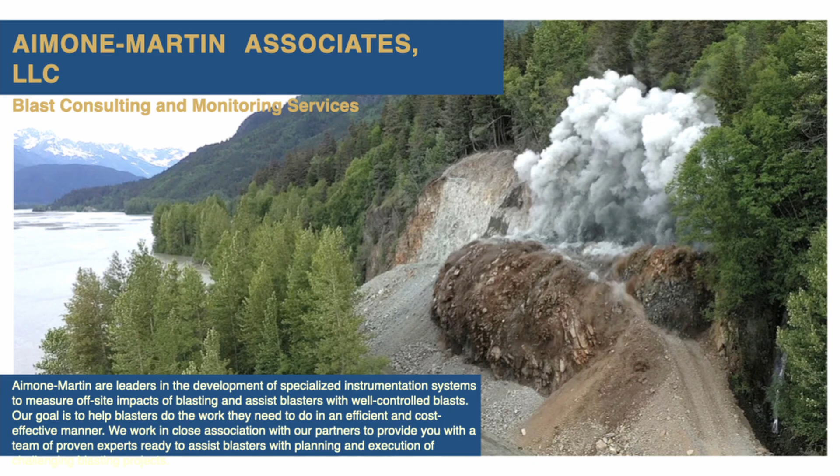This episode's presenters are Chuck Dowding of Northwestern University, Cathy Aimone-Martin of Aimone-Martin Associates, and Johan Gjodvad of Sigicom AB. Professor Charles Dowding is co-author of a number of USBM publications which are the basis for blasting regulations in the United States. He is also known for his 4 books. He's a former member of the Board of Directors of the International Society of Explosive Engineers and a distinguished member of the American Society of Civil Engineers.

Dr. Cathy Aimone-Martin is president of Aimone-Martin Associates in New Mexico. She served for 25 years as Professor of Mineral Engineering and is currently an Emeritus Professor with the New Mexico Institute of Mining and Technology. Cathy has over 40 years' experience in quarry and construction blast consulting and monitoring, specialised in close-in blasting effects on above and below ground structures. Dr. Aimone-Martin is the author of over 87 publications and regularly conducts training courses for blaster certification in 11 states.

Johan Gjodvad is a Strategic Partnership Manager at Sigicom, where his focus is innovation and the international market. His work ensures Sigicom continues to be a top innovative producer of hardware and software for environmental monitoring. Johan has extensive experience on environmental impacts like vibration, noise and dust from various sources, blasting during civil works and demolition using explosives. He has been part of the Danish Federation of Explosive Engineers since 2006 and is past president of the European Federation of Explosive Engineers.

This tag team presentation will begin with a graphical portrayal of the many levels of monitoring. We start at the lowest level, data, a single point. Did the peak particle velocity and/or time history of the blast satisfy a criterion? Quality of that data is heavily dependent upon seismograph placement, which is in turn dependent upon the training of the seismograph operator. Moving up to the second level, information, involves a second data point that allows drawing of straight lines.

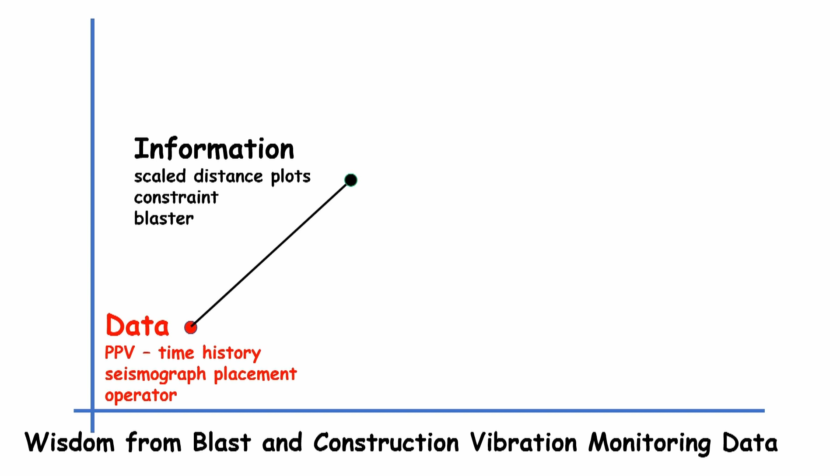Most often seen are scaled distance plots employed by blasters to describe influences of geology and constraint on expected peak particle velocity. Dr. Aimone will be presenting case studies of various uses of scaled distance plots.

3 data points allows construction of nonlinear relations and introduces a third level, knowledge. The Z-curve relation between dominant frequency and allowable peak particle velocity is such an example. Seismograph manufacturers are important stakeholders because they provide software to determine dominant frequency of time histories of the measured ground motions. The next level, wisdom, involves knowing how measurements compare with appropriate criteria.

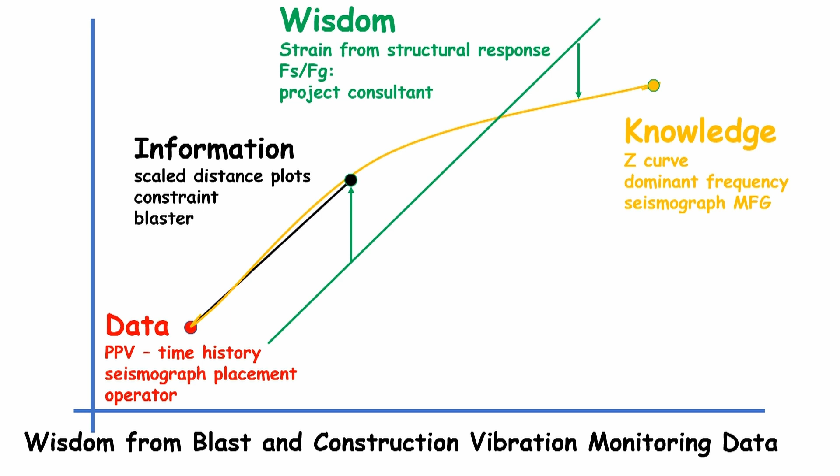For example, comparison of allowable strains with those calculated from measured structural response. Project consultants are most often involved in these determinations of critical strains. Finally, regulations need to be considered, and as shown, are not always consistent with physics-based criteria, for they are the rules by which the governing authority operates. An example might be the difference between a regulation based upon annoyance instead of cosmetic cracking. Johan Gjodvad will discuss the project to compare regulations around the world.

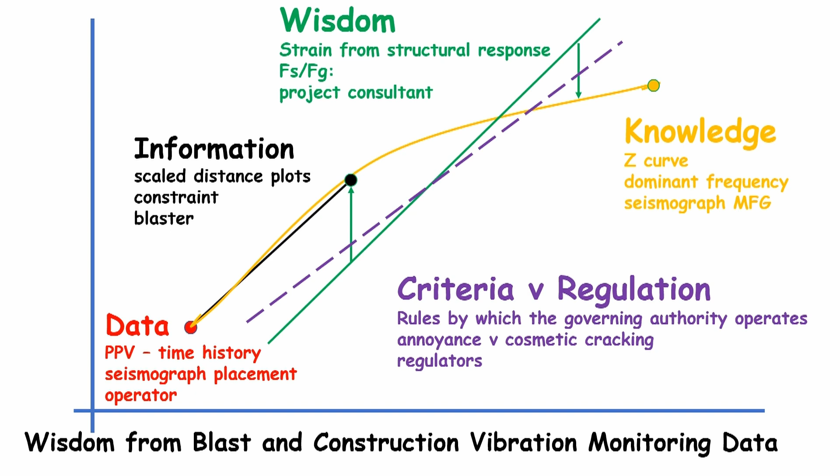This rubber band model of the structure on the left demonstrates the importance of frequency in addition to peak particle velocity. Most important is the ratio of dominant excitation F sub G to the natural frequency of the structure F sub S. This drawing shows that the cup is analogous to the mass of the structure. The stretch or strain of the rubber band is analogous to the strain in the walls of the structure, and the motion of my hand is analogous to the ground vibration motion. So watch this movie while I take a rest.

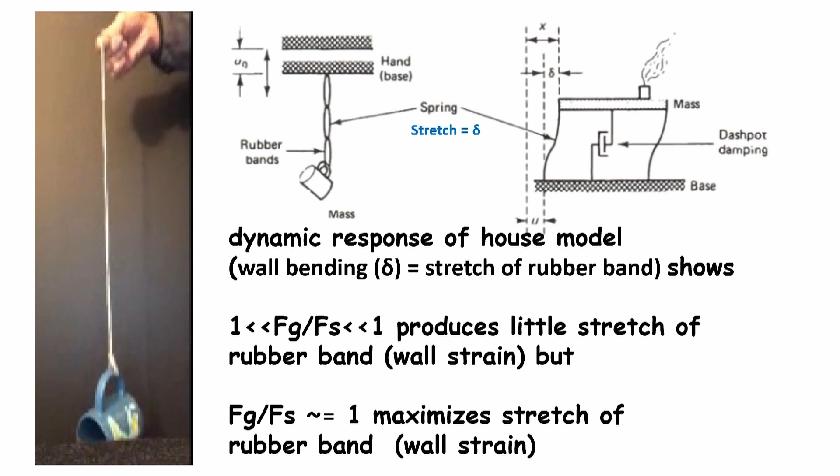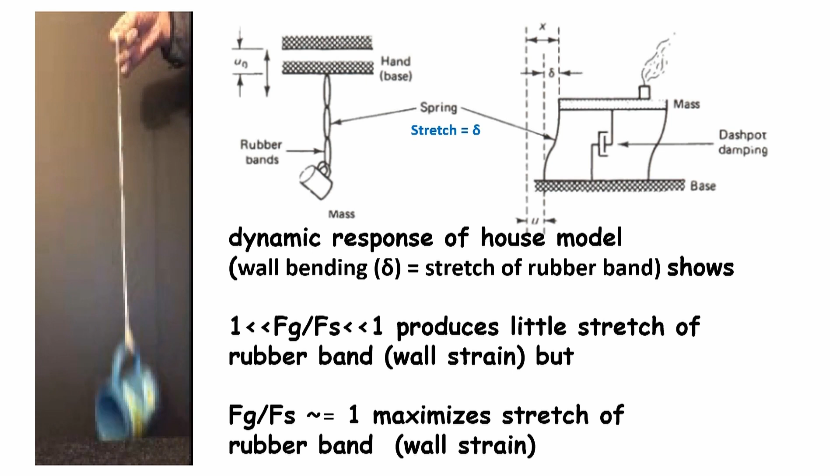This simple dynamic system responds at its natural frequency when excited with a single pulse. If it's excited with a high frequency, little stretch in the rubber band occurs. Also, if it's excited at a low frequency, there is little stretch in the rubber band. However, when excited at its natural frequency, the system's response is maximized. This response and stretch in the rubber band is equivalent to the strain, which causes cosmetic cracking.

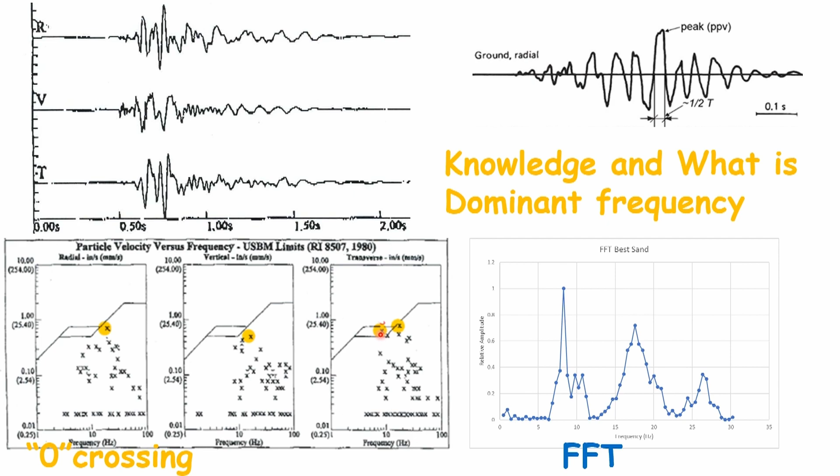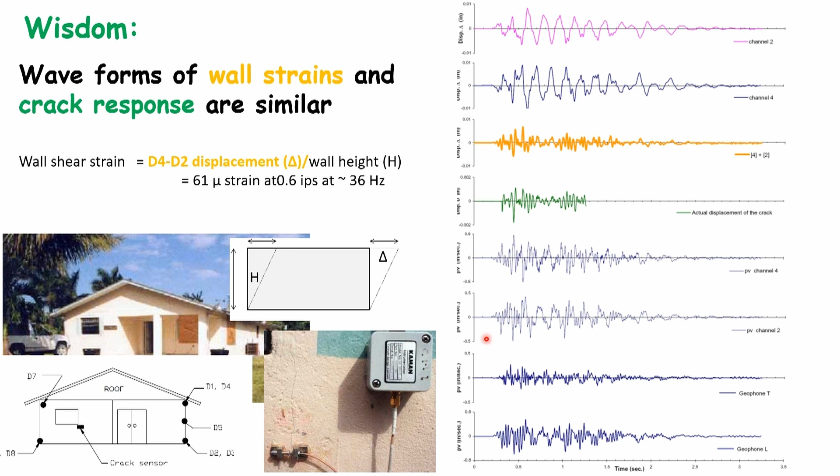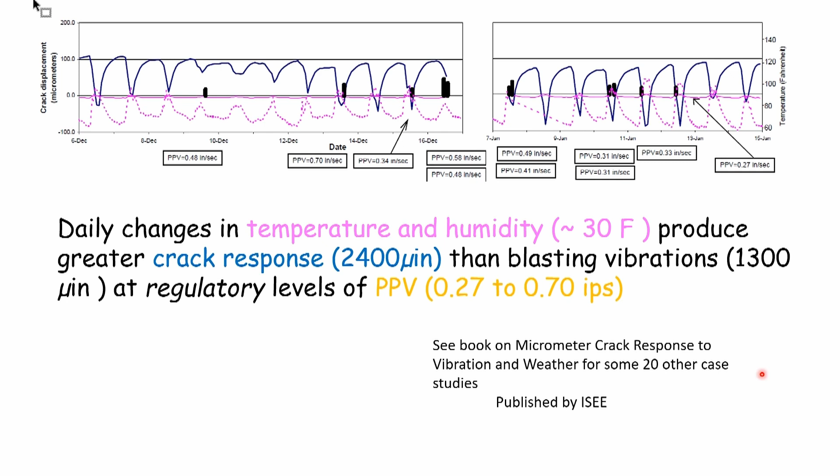Comparison of the long-term crack response in dark blue with the vibratory response in the black bars for the case history just described shows that daily changes in temperature in pink produce crack responses that are 2 times larger than that produced by blasting vibrations that exceed 0.5 inches per second. Furthermore, cracks open and close even more with the changing seasons of the year. For more response on this and other case histories, please see my book on micrometer crack response.

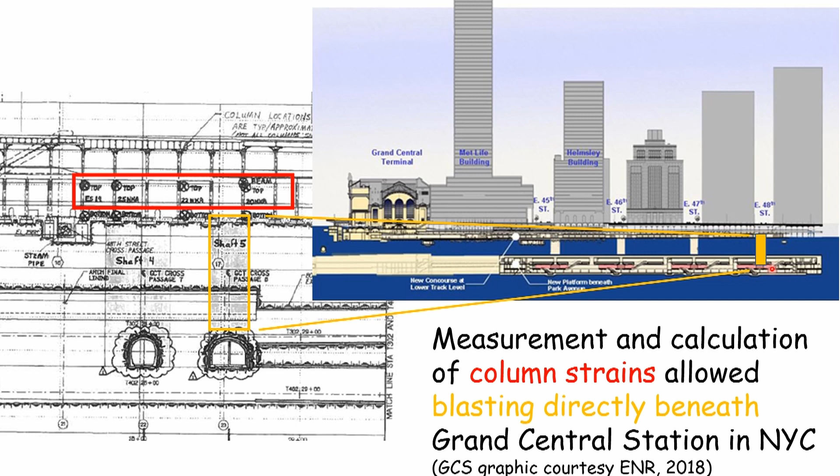During the blasting for ventilation shaft number 5 here, that occurred within tens of feet of the column foundations, column strains were directly and indirectly measured. Direct measurements were made with foil gauges glued to the steel after the fire-protecting concrete was chipped away. Indirect measurements were made by measuring the velocity response time histories at the top and bottom of the columns.

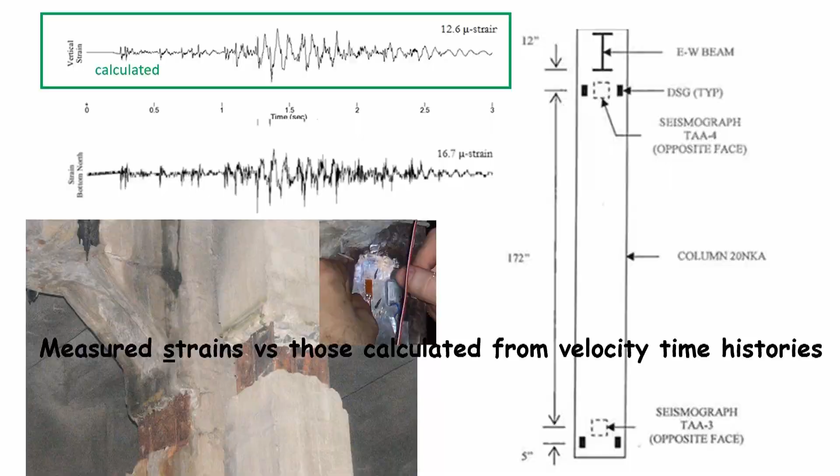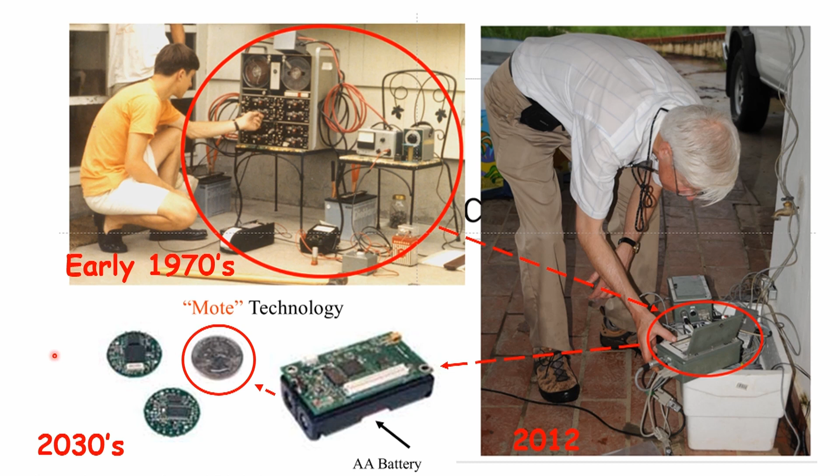There are two important things to take away from this presentation. The first is that the response of structures and the subsurface is a function of the strain induced by the passing of the ground motions that we commonly call blasting vibrations.

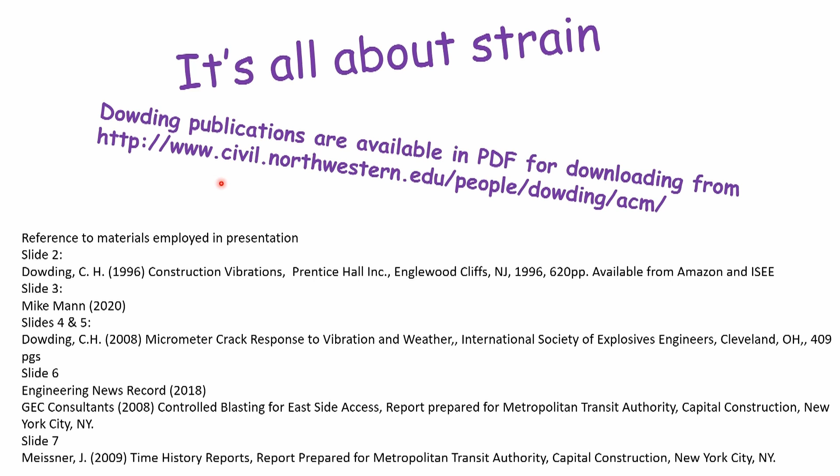Hi, I'm Dr. Cathy. I serve as a blasting consultant on many close-in and challenging rock blasting projects in construction and mining. I will discuss vibration monitoring and the use of seismographs placed close into blasts to compare the response of ground vibrations for different explosives and powder factors, time delay systems and timing, and illustrate best practices when responding to structure damage claims.

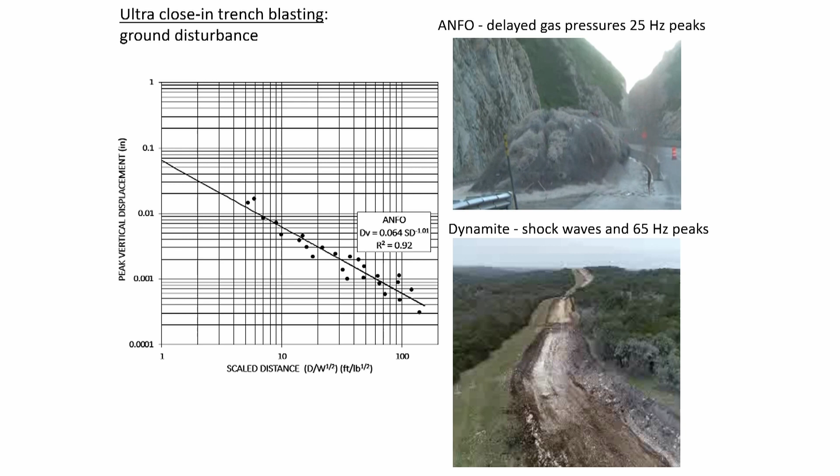ANFO delayed gas pressures shown here create excessive vertical rock motions at 25 Hz dominant frequencies, and the disturbance of the rock is well outside the trench perimeter. Close-in vertical ground displacements and attenuation rate, shown in the attenuation model to the left, are indicative of gas forces lifting the rock outside the trench perimeter.

Using dynamite, the blast shown to the right, one can clearly observe the detonation wave associated with very little ground disturbance outside the trench perimeter. 65 Hz peak frequencies dominate, and the more brisant explosives result in a far faster attenuation of vertical displacements outside the trench, shown with the model in the red symbols.

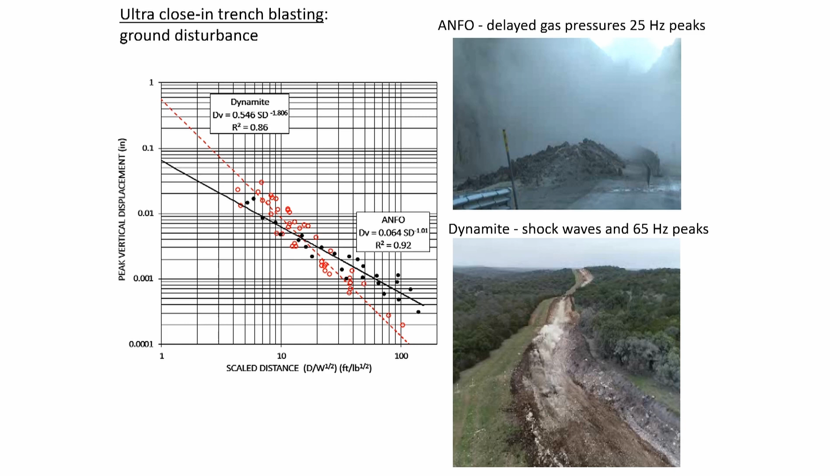Several blasts were performed at this limestone quarry to compare the performance of 3 initiation systems that included det cord delayed by row, non-electric pyrotechnic delays, and electronic delays. Fragmentation was characterized using Split software, and attenuation models for the 3 systems are compared in the lower left-hand corner. A power draw meter was placed in line at the electric meter station to continuously record primary crusher power consumption for each staged blast using a unique delay system.

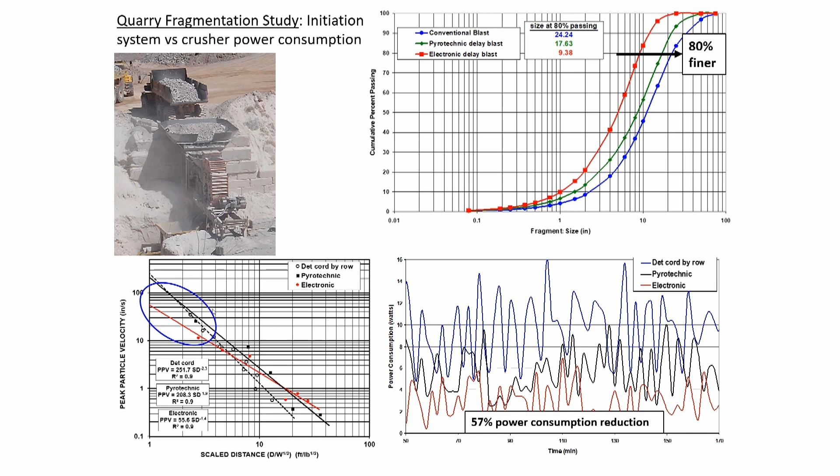The case of this Florida quarry is one of undershooting and wasting explosive energy. The quarry moved blasting operations from the northeast area to the southwest area and closer to inhabited structures. Electronic delayed blasting typically was performed with a powder factor of 0.2 pounds per cubic yard. The attenuation model provided a slope of -1.4 and an acceptable R-squared of 84%. In the southwest area, 4 decks of 100 pounds per delay were required to meet vibration limits.

Beyond a scaled distance of 10, peak particle velocity amplitudes were far higher than expected, and the model exhibited a slower attenuation rate at -1.26. After 5 blasts, we realized that we had cut our powder factor in half, and we were undershooting the rock, resulting in wasted energy. We adjusted the loading at a powder factor of 0.18 with 350 pounds per delay, and the attenuation fit in red exactly hit the 80th percentile line of the original model. Vibrations at the closest structure plotted right on the U.S. Bureau of Mines safe limit.

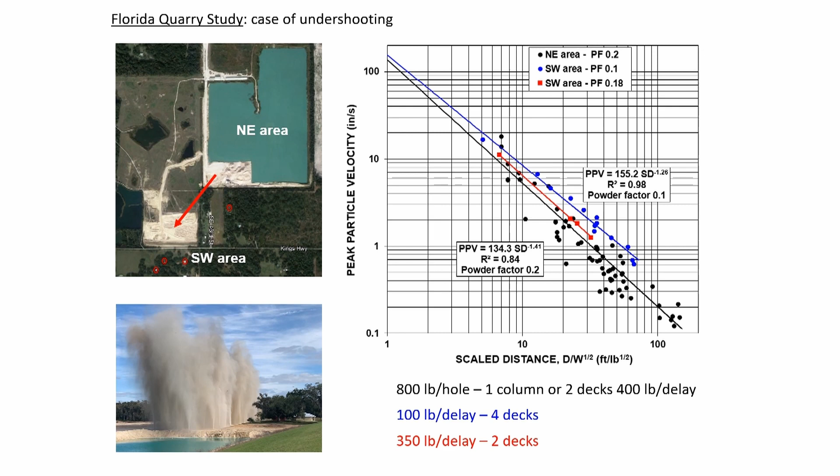The owners of the house outlined in yellow in the upper left photo initiated litigation against the nearby quarry to the north. The house sits within a 50 square mile area of documented slope instability and shallow landslide susceptibility. The claimant believes blasting damaged the home and claimed loss of value subsequent to a home sale, although no visible cracking in the house exists. Landscaping and asphalt drive show evidence of significant downslope soil creep toward the river to the south.

Seismographs were placed at the road 220 feet away from the house by the blaster, consistently generating PPV under 0.75 shown in the lower left. However, these amplitudes ranged in frequency between 2 and 15 Hertz, matching the natural frequencies of structures, as Dr. Dowding demonstrated with his bouncing cup. This frequency matching contributed to amplified structure motions and was undoubtedly perceived by the inhabitants as damaging.

The site attenuation model shown to the right, using records supplied by the blaster, resulted in an unacceptable regression correlation coefficient of 36% and a median y-intercept of only 3.9 inches per second, which is far too low for igneous rock. Such a model could not be used in the litigation case. We subsequently developed a more representative model and compared it with the blaster's model here in red. Data correlated perfectly; we now have a reliable model to predict worst case, highest possible ground motions at the claimant's structure to refute this claim.

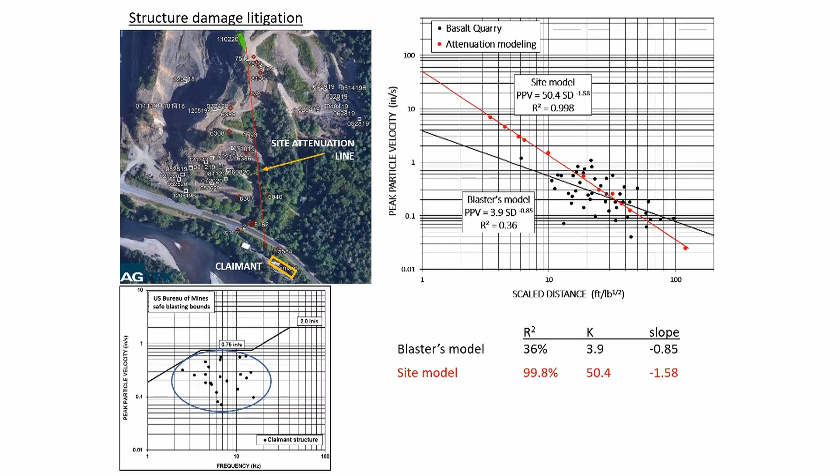In these examples, we have used site-specific ground motion attenuation models to explain and improve blasting performance. Such modeling can be extended beyond ground velocity using sophisticated seismographs with 8 channels and sample rates up to 128K. Breakout boxes can integrate seismographs with a variety of displacement, velocity, acceleration, and pressure sensors for a wealth of instrumentation demands in the air, underwater, and on structures as well as in the ground. As Dr. Dowding suggests, the future of instrumentation may be limited only by our imagination.

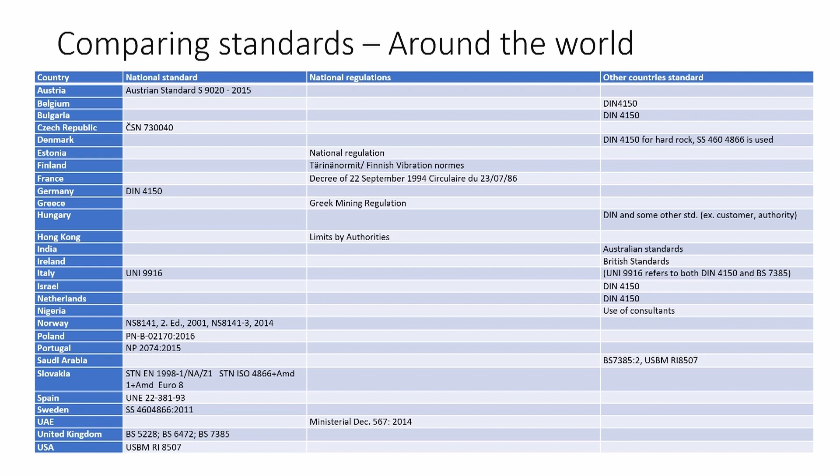The major difference between standards is whether the standard takes frequency into account. Most countries include frequencies, meaning that a higher frequency allows a higher PPV. In a few countries, the PPV value depends on the distance and on the underground. And then there is a third kind where the PPV value is independent of other parameters.

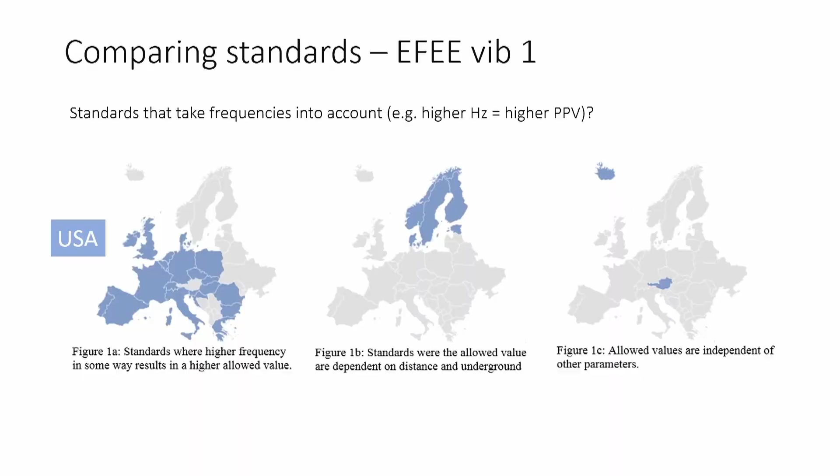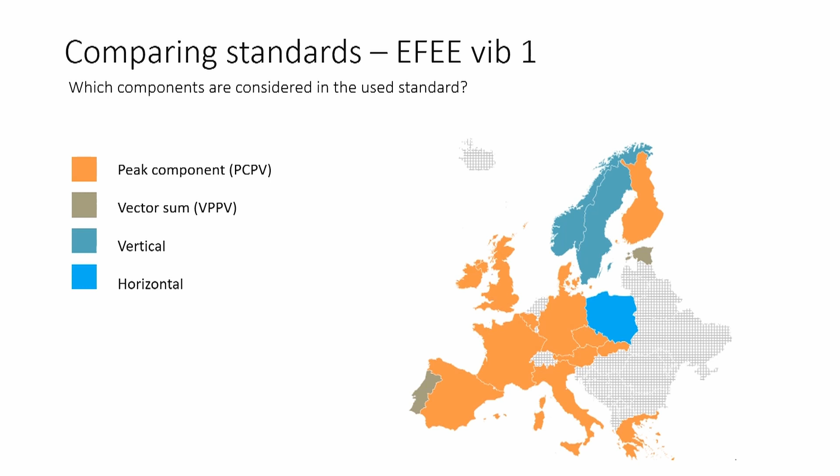A few countries make a sum of the components, as you can see in green, and two, Sweden and Norway, only consider the vertical components. I could explain to you why I believe that is the case. And a single country or standard makes use of the horizontal component.

Here's a graph showing some of the major standards which include frequency. The vertical axis shows velocity, while the horizontal shows frequency. Here it is well illustrated how PPVs with lower frequencies are considered more dangerous. There are different graphs depending on what type of house or structure is considered, of course. In this case, the standards are for residential houses or similar. Other categories could be fragile historical buildings or office buildings and so forth.

And there are, of course, completely different rules for tougher installations such as harbors, roads, etc. As you saw on the previous slide, this type of standard based on frequency is the most common. The red graph at the top is the USBM. It seems like the most lenient of the standards, allowing the highest values. However, it is also the standard we have found to be best documented, which is why it can defend the allowed high values.

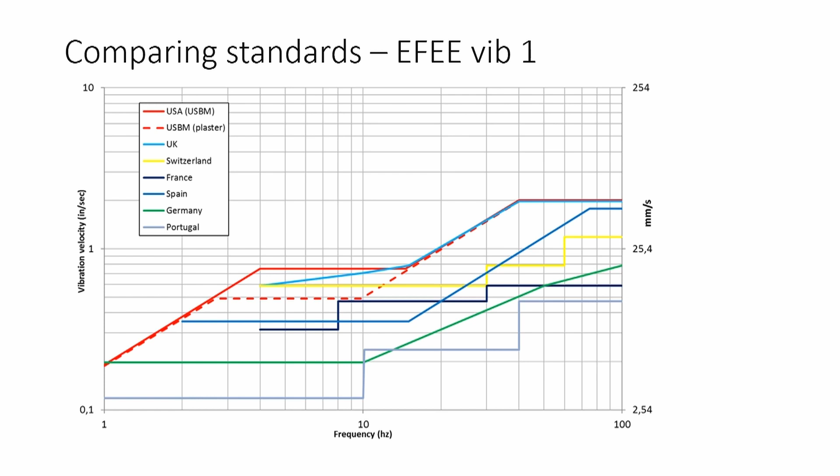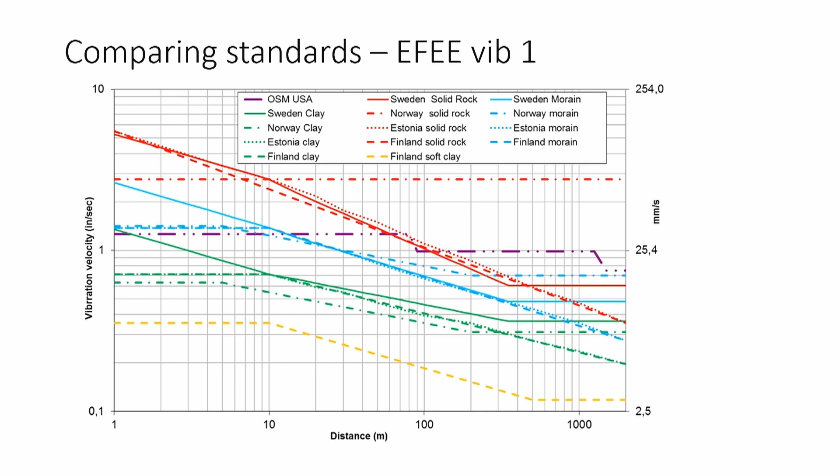Here, an overview of standards that depend on distance and the type of ground material under the structure. In principle, lower levels of vibration are allowed at longer distances and softer underground.

Positioning is different. It can be dug down, as they do in the US. It can be placed on the foundation, and some actually place additional seismographs on the top floor. And there are national standards by law, some just refer to other national standards, and some just do business as usual without actually knowing why.

Why is there this difference? Well, in our project we needed an explanation. Therefore we set out to make a second phase of the project. Of course we've been a bit delayed by the COVID pandemic and how the world looks because of that, but we aim to start monitoring as of March 2021. So basically while you're looking at it, I'll probably be on my way soon to the site. Well, the idea is to physically compare the different standards, to challenge them and see the difference in a live project.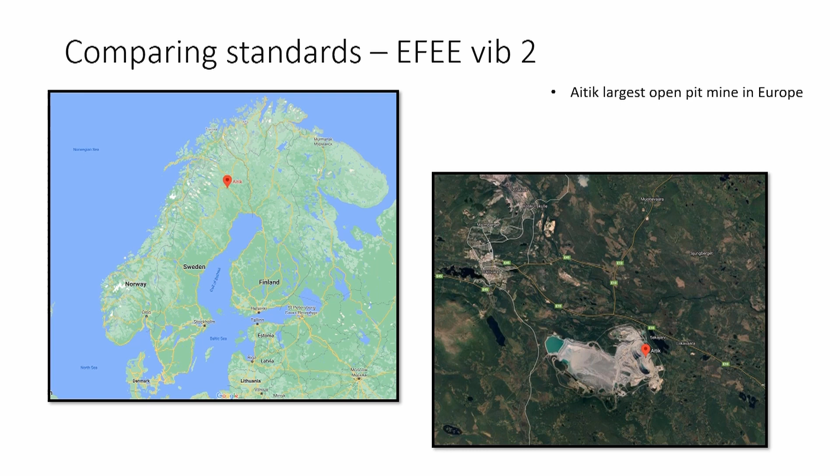We have been lucky to get access to the largest open pit mine in Europe, the Aitik mine, north of the polar circle, which blasts all year round. It's very close to Santa Claus, I should tell you. We have been given access to install equipment on the buildings, and we have actually already made our first site visit and installed equipment which is monitoring as we're speaking.

We cooperate with a local technical university, Luleå Technical University, on the project and have gotten a master student from them who is going to write his thesis based on the data and the things we're looking at, which is actually also to compare standards.

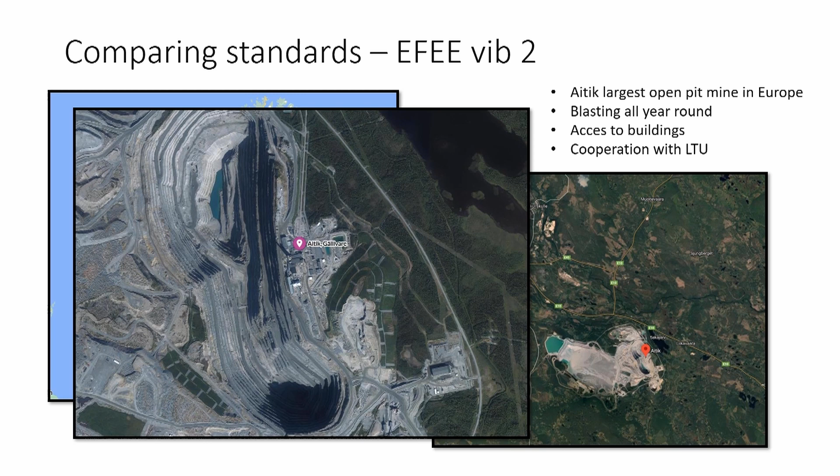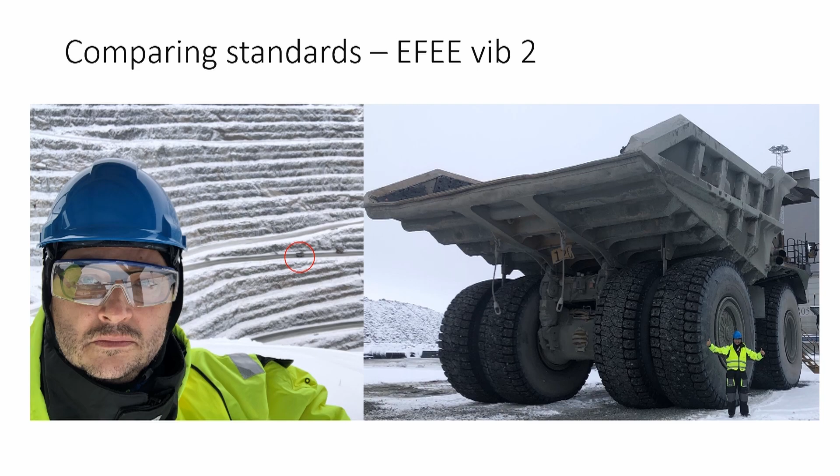Just to show you the size of the Aitik mine, the red circle on the wall behind me on the left picture is the dumper shown in the picture on the right side. I'm standing next to the wheel of this 297-ton dumper, and I'm about 190 centimeters, which is approximately 6 feet 2. So big production. Here's a cross-section and overview of the planned monitoring equipment.

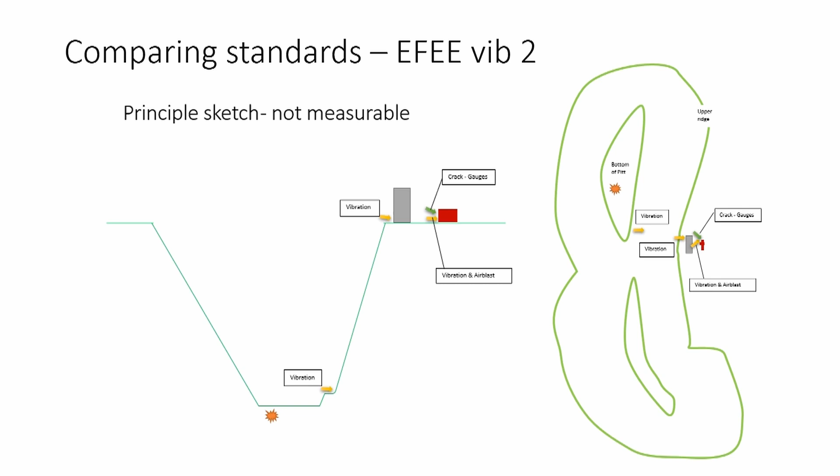There will be vibration monitoring in the bottom of the pit, on a service building down there. There will be vibration monitoring at the first structure coming out of the pit. And finally, there will be several vibration, crack and air blast sensors on the first building, which resembles a residential house. This final slide shows how the equipment is thought to be mounted.

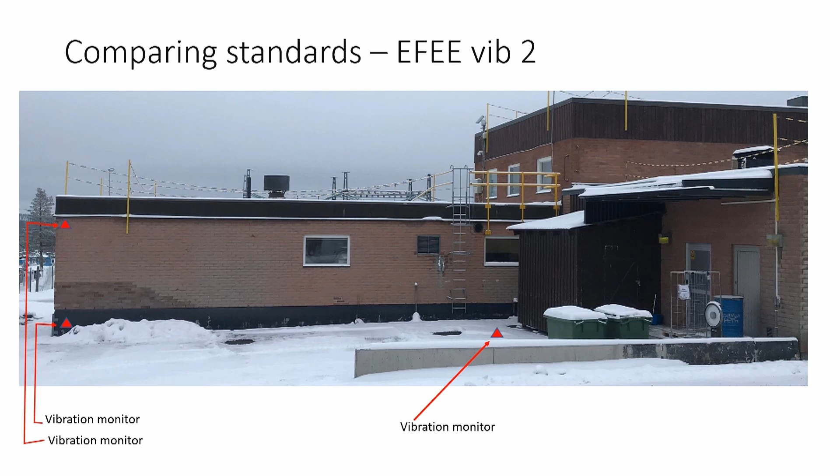The first vibration monitoring position is on the ground, which is to resemble US practice. The second on the bottom of the foundation is according to German and several other standards. The third on the top of the building is to be able to calculate global shear strain, which is also the case for the fourth position protected by the ladder.

The orange square approximately indicates where we will install crack gauges to monitor cracks. Crack monitoring was introduced by Professor Dowding in one of the previous presentations. And on this project, Professor Dowding also ensures that crack monitoring is done the best possible way.

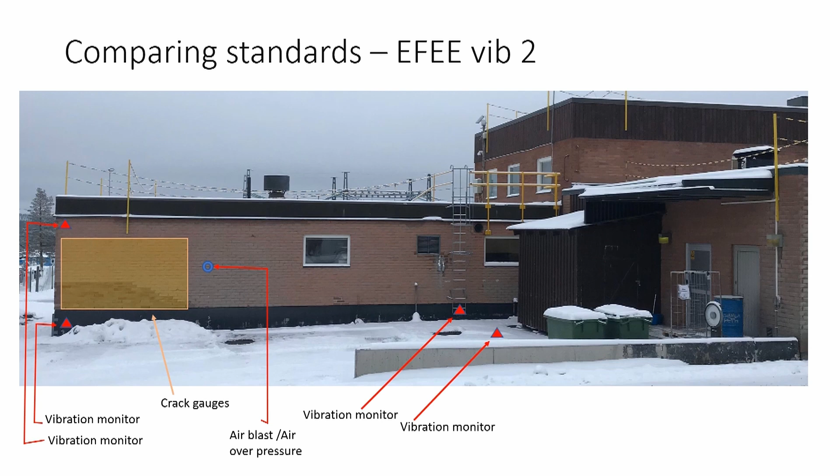The blue circle indicates where we will install an air blast microphone or air overpressure microphone to be able to record changes in pressure originating from the blast. I can assure you that in this blast there will be no high values, but we still need to monitor it.

Finally, it's important for me to stress that monitoring is closely connected to what has always been a key issue for the world of explosives, namely safety and health. This both for our colleagues, but also third parties like people living nearby, nature or animal life. We care about our surroundings.

Blasting is great fun, and so is monitoring, but in our daily work as professionals, we take great care both to optimize but also to protect ourselves and our surroundings. And as technology enhances, we can work close to the limit, optimizing the production, but also at the same time ensuring the safety of our surroundings.

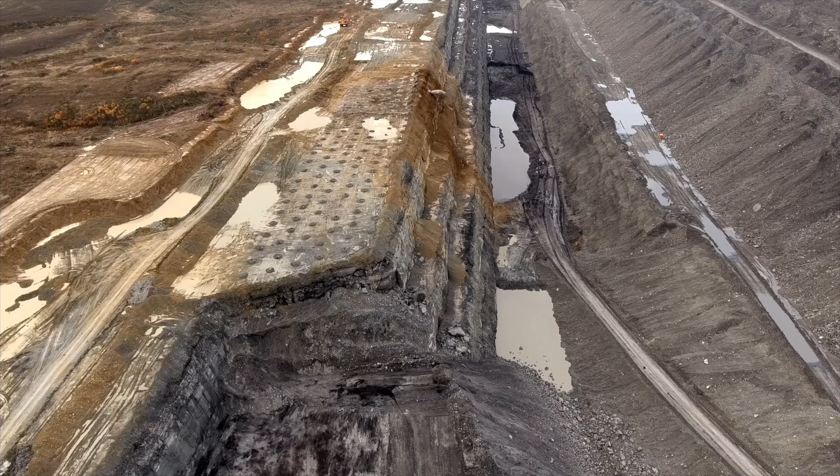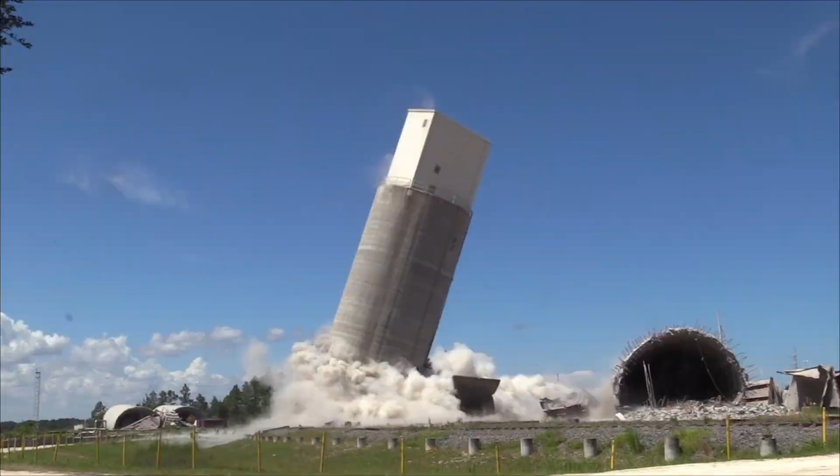Explosives are the ultimate power tool that help mine the minerals and materials that are used in creating many of the products and roadways we use each and every day. They help keep our towns and cities safe from avalanches. They are used to shape and improve the environment and also in military and demolition applications. And they're in some of our favourite TV shows, movies, sporting events and concerts.

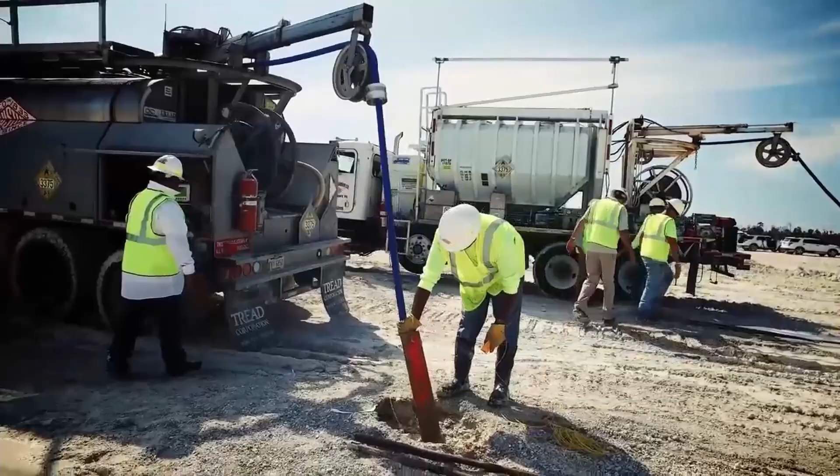Our job as professionals in the explosive industry and at the ISEE is to ensure explosives continue to be handled and applied in the safest way possible, and to continue to provide the resources and tools needed to help advance the science and art of explosive engineering.